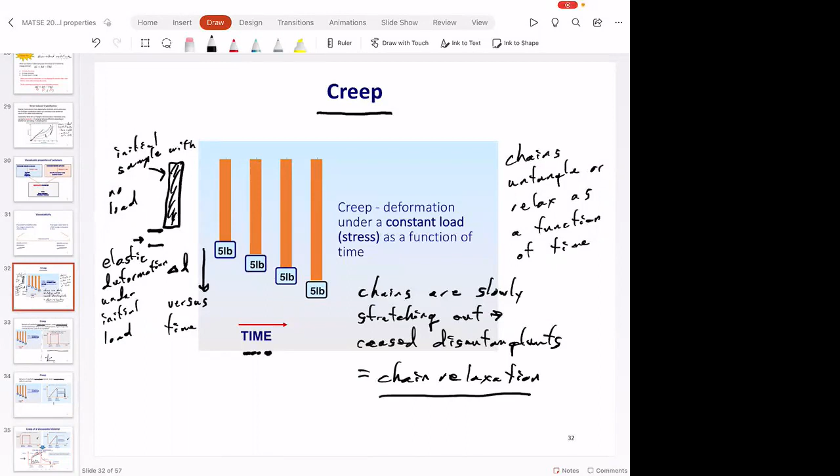Then from that strain, you get creep, or the delta L goes up, up, up, up. So the strain increases as a function of time. That's exactly what we've shown in this diagram right here. So strain increases because we're at constant stress or constant load.

And then when you take the weight off, you get some part of this elastic response back. So don't forget that in a spring, you can go both ways in terms of increase the load and increase the elongation, or decrease the load and decrease the elongation. So there is always some part of an elastic response versus something where you stretch it and it permanently deforms.

That's the plastic response of the material. And then you have some sort of creep recovery, and then you have permanent deformation as a result of that. So this is worth thinking about what's going on in a creep experiment. Questions on this? Okay, remember there's a scientific definition of creep.

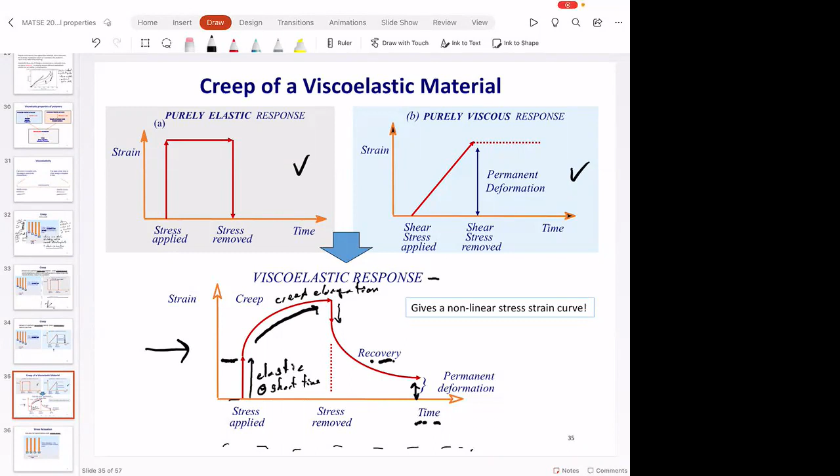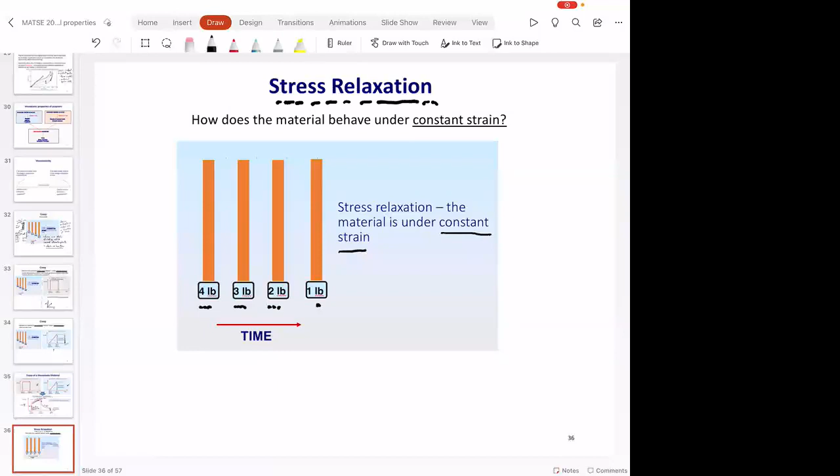So I'm going to elongate this like a delta L of 20% or something like that. And if I hold that polymer sample at a given elongation, you see the load it can support goes down as a function of time. So in effect, if I'm at a constant deformation and the stress is going down as a function of time, what's happening is my effective modulus is going down, down, down, because modulus is calculated from the slope of the stress strain curve.

So let's say I'm going to strain it 0.2, or 20%. This is, say, the 4-pound point. Then I'm at the exact same elongation, 3-pound point, 2-pound point, 1-pound point. So as a function of time, my stress is going down, down, down. And so the effective modulus, the slope of this line, is going down.

And it turns out that's also due to chain relaxation. When I stretch a polymer sample, all those chains are stretched out a little bit. And as they disentangle and relax, the material gets softer and softer because of chain relaxation.

Due to chain relaxation. So it's the exact same chain relaxation phenomenon that's happening that causes both of these responses. That's why it's important to know when creep is happening, under constant load, versus when you're under a stress relaxation situation, constant strain, and the load is going down.

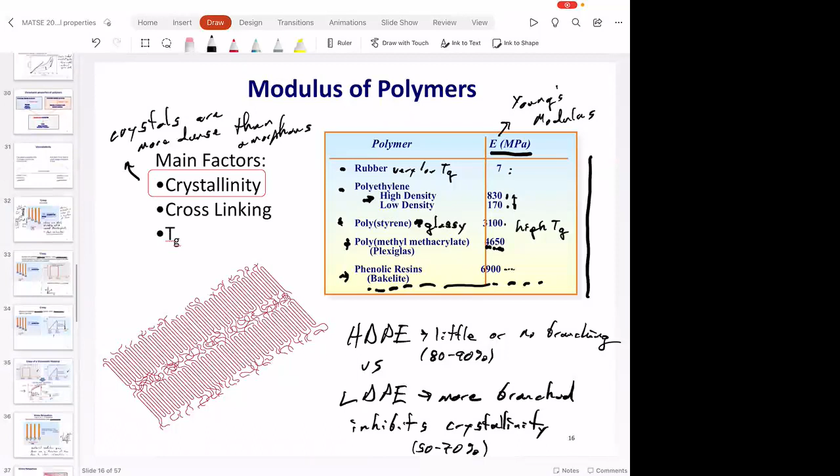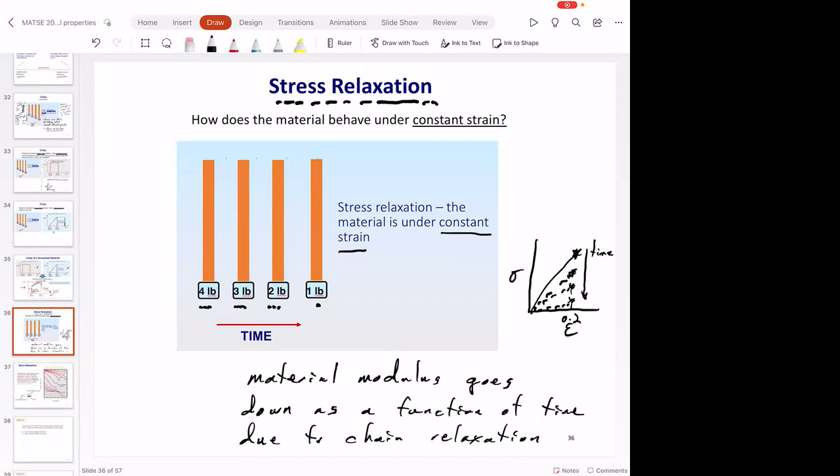We're going to talk about cross-linking. Crystallinity is a hard one because it has both amorphous and crystalline parts, but we'll talk a little bit about that. We think about chains for these types of properties because it's the intrinsic chain motion, the flexibility, the disentanglement that causes this type of viscoelastic response. People measure stress relaxation and creep all the time in polymers.

So in addition to the intrinsic properties of the polymer chains, temperature plays a big role in this. You raise the temperature, and do chains relax faster or slower when you increase the temperature? They relax faster, right? That's natural. You heat the chains up, they move around more. So creep happens faster at higher temperature, and stress relaxation happens faster.

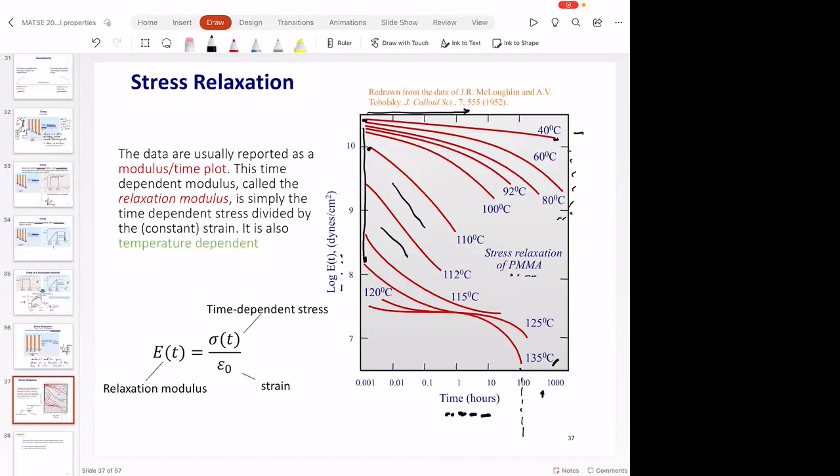And of course, if we didn't have any stress relaxation, we'd also have something that's perfectly flat, which means modulus doesn't change as a function of time.

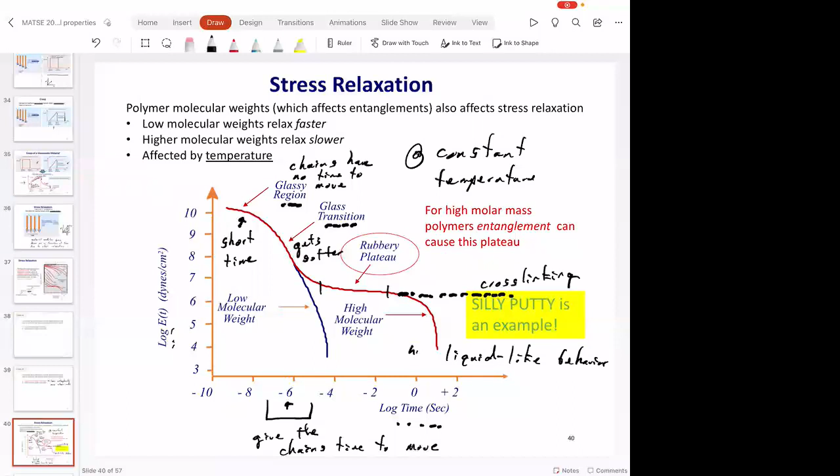Red. Higher TG polymers relax more slowly. Remember, glass transition temperature is a thermal property of the polymer. Here, we're addressing the time-dependent property. So even though we call it the glass transition region, it's time that we're really changing as our independent variable in the experiment. So this might be a high TG polymer, and this would be a low TG. When we talk about high TG versus low TG, we're really talking mostly about chain stiffness and some intermolecular interactions.

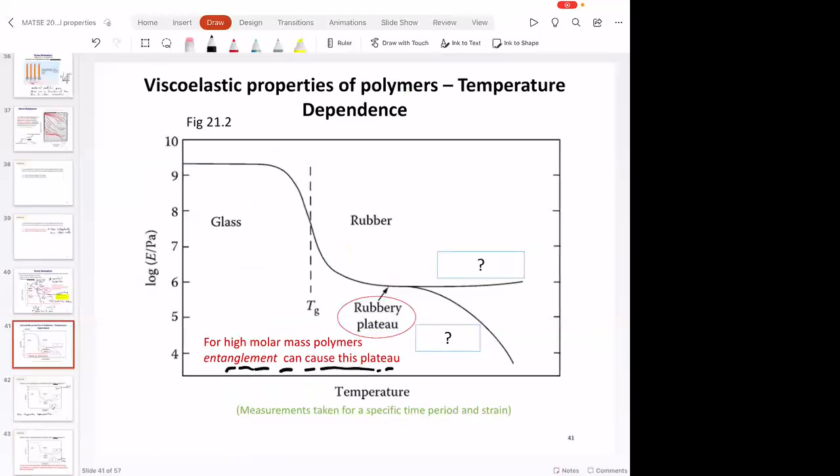Instead of waiting 100 seconds, or sometimes you see plots on the time where it's like 10 to the 5 seconds, that's getting to be a long experiment, you can just heat up the temperature and you can get exactly the same information. And there will be a lot to say in your advanced polymer classes about time temperature superposition.

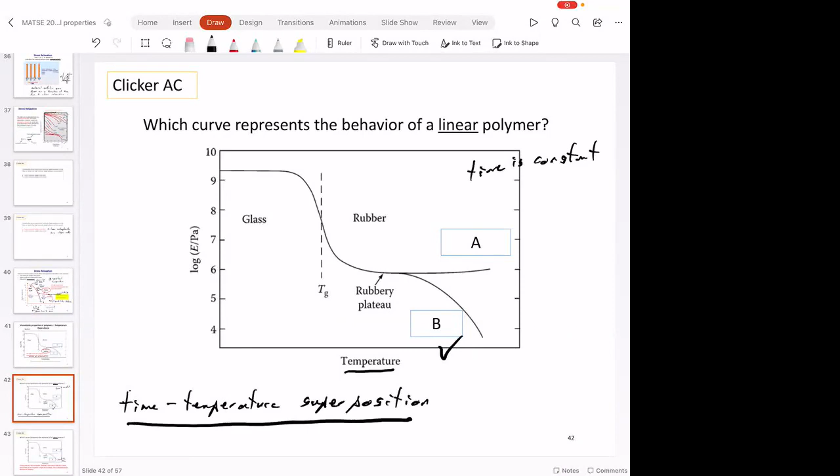And either Professor Hickey or Professor Colby will ask you, have you guys ever heard of time temperature superposition? And you could say, yeah, we heard about it in 202, but let's go into the details of how to relate one to the other, because there's some quantitative relationships that you can use in order to construct these time temperature superposition plots.

And again, having some feeling for what the molecules are doing, this is all about chain relaxation, and I can either wait for those chains to relax, increase the time, the material will get softer, or I can heat up the material, chains relax faster. If chains are relaxing faster at higher temperature, the material will be softer as well. Make sure that you are able to equate what the chains are doing with changes in time or changes in temperature. That's, I think, a new concept for lots of you, but this is fundamental to how polymers behave. Every polymer has a glass transition temperature, nearly every single polymer does this without exception. All right, questions or comments?

Yes. So for linear polymers, don't they usually have higher TG?

No, linear polymers don't have anything to do with TG. You can have a linear polymer with a high TG or a low TG. You can have a cross-linked network polymer with a high TG, or a cross-linked network polymer with a low TG. It's really the polymer structure or the monomers that tell you about chain stiffness and TG.

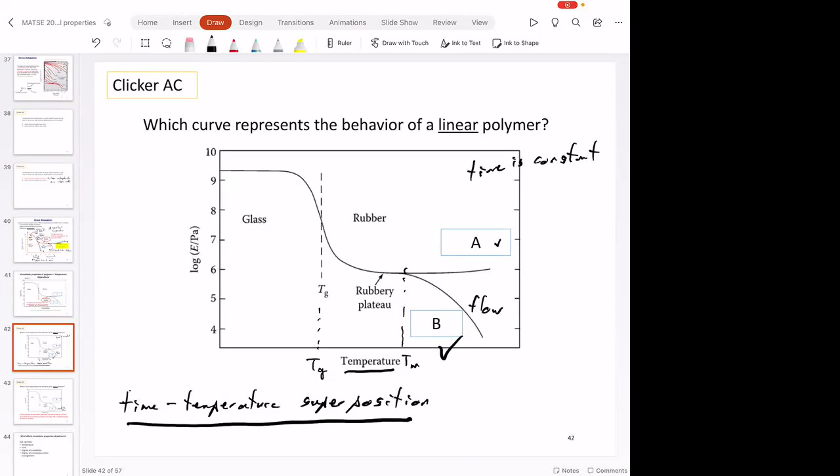Okay, any other questions? All right, last topic. So we're going to talk a little bit about viscosity and polymer melts, and then this will be the last thing for the exam. So you have an idea of what's happening with viscosity, right? It's the resistance to flow, and all Newtonian fluids have a defined viscosity.

I know the chemical engineers will really like this. If you make a measurement of the viscosity of a fluid, you build up the shear stress, and you have a shear rate that's defined by the gradient of the velocity and the distance. This shear rate is important because we just talked about time being important.

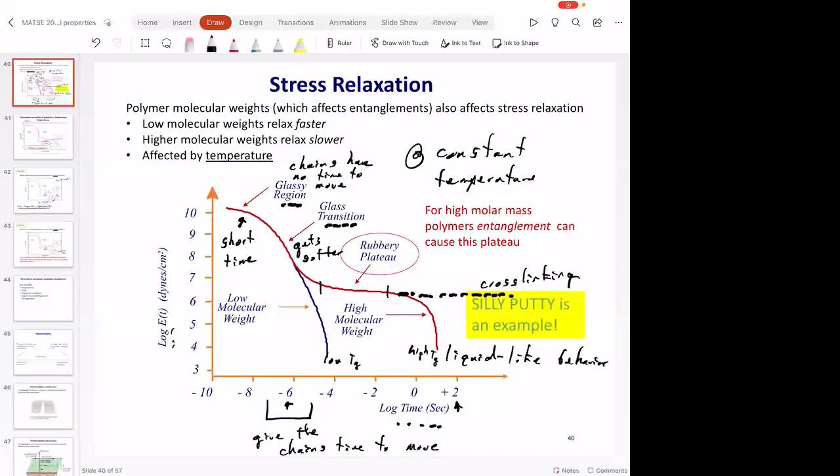What's the relationship of rate and time? Rate is just something per time. So higher shear rates mean what—a higher rate is really effectively higher time or lower time? Lower time. So as I increase the shear rate, I'm moving to lower time on this plot. If I increase the shear rate of a polymer, it's going to be more glassy. In effect, this time is usually expressed as a shear rate or as a frequency, and that's something to watch out for.

So shear rate is important because this is a time embedded variable.

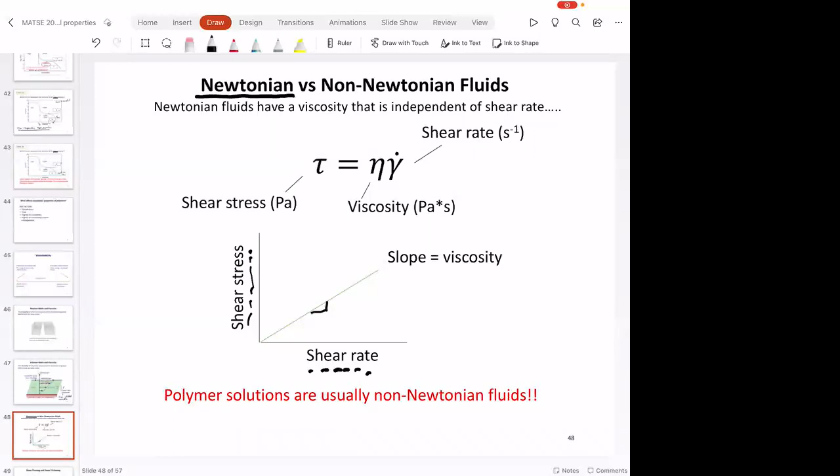A Newtonian fluid is defined as a linear relationship between the shear stress and the shear rate, and the slope is the viscosity. This should look familiar, just like elastic solids—elastic solids have a linear relationship between stress and strain. This is not the same as stress and strain, but this is the definition of what a Newtonian fluid is. And you get the viscosity from that.

Anything that is not an exact line between shear stress and shear rate is a non-Newtonian fluid. There's lots of cool behaviors of non-Newtonian fluids, but in essence we have shear thickening fluids.

So the question is: is polystyrene going to be Newtonian? No, polymers are almost always not Newtonian. The other question is whether it's going to shear thicken or shear thin, because it can only be one of those. And in general, polymers are shear thinning.

Does anyone know why, in general, polymers are shear thinning? As you shear the polymer in this parallel plate experiment, the effective viscosity goes down. Does anyone have a guess? Because you're straightening out the chains. You're straightening out the chains, and then what happens when you straighten out the chains like that? Why does the viscosity go down?

It's easier for them to slide past one another when they're a little bit straightened out. And in that act of shearing, you disentangle them a little bit. It's not like you shear it for a second and stop—this is steady state shear. So you're shearing it, which means you're disentangling those polymers. They're wanting to assume their equilibrium conformation, so they're disentangling from one another as you keep shearing it. So the effective viscosity goes down, and that's why polymers in general are shear thinning.

So you can answer that. Does anyone know a material that in general is shear thickening? And then you have to know the mechanism—why does it shear thicken?

I was almost like... isn't it like some sort of thing that hardens, and it's like—I forgot what it's called. It's like particles and they compact. Yeah, you're getting it.

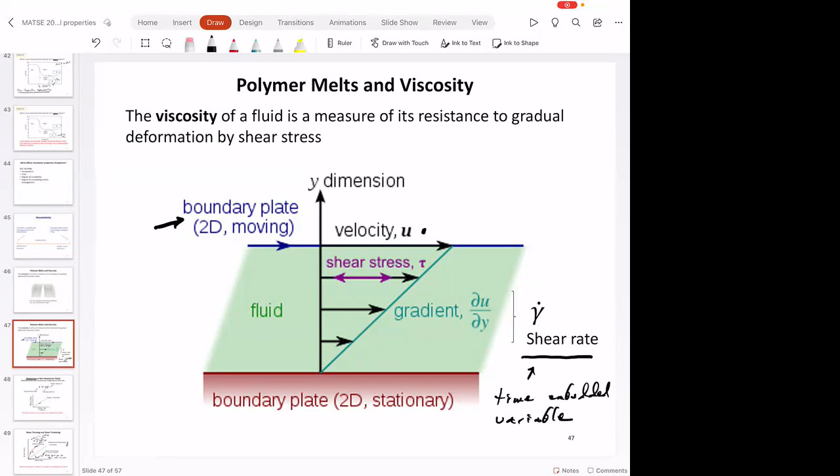So you need to think about what's practical versus what is the thought experiment. The thought experiment is that you have enough energy to move that plate as fast as you want, so you can go up and up in shear rate, and this shear thickening is going to go way up, asymptotically, and you can do that.

In reality, like in oobleck or in a magnetorheological damper or something like that, those things shear thicken so much they really slow down the shear rate, and then it goes back—it gets softer again. Good question. Any other questions?

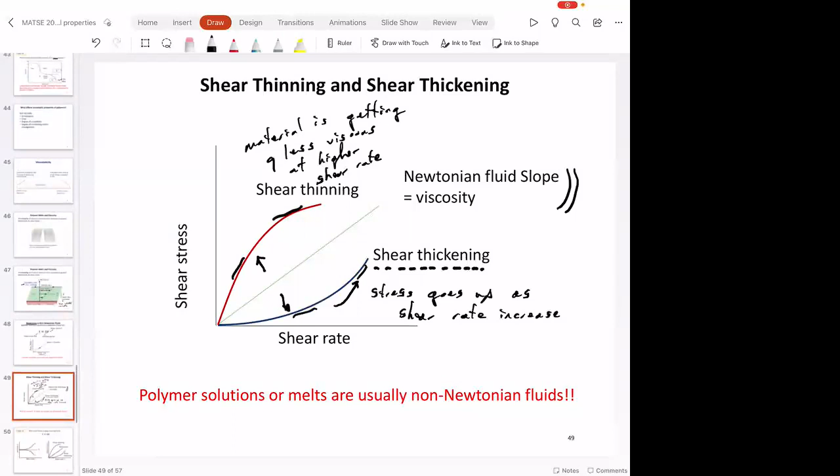All right, I think this is the last clicker question of the day. Which plot shows a shear thinning fluid? We know that this one is shear thinning, this one is Newtonian, and this one is shear thickening—remember this is shear stress versus shear rate. So the question is how to identify that on a viscosity, effective viscosity, or dynamic viscosity plot.

Of course, in some cases it's even a little bit easier if you remember that the derivative is the dynamic viscosity. This is shear thickening, and C is shear thinning. Of course, B is Newtonian. There we go, and so shear thinning, great, we got back to 45.

So shear thinning is really common in polymers because of this stretching out idea of the chains. The formula before, that was just for Newtonian. That's right, so this is a linear relationship, and so this is for Newtonian. I guess Newtonian has a capital N.

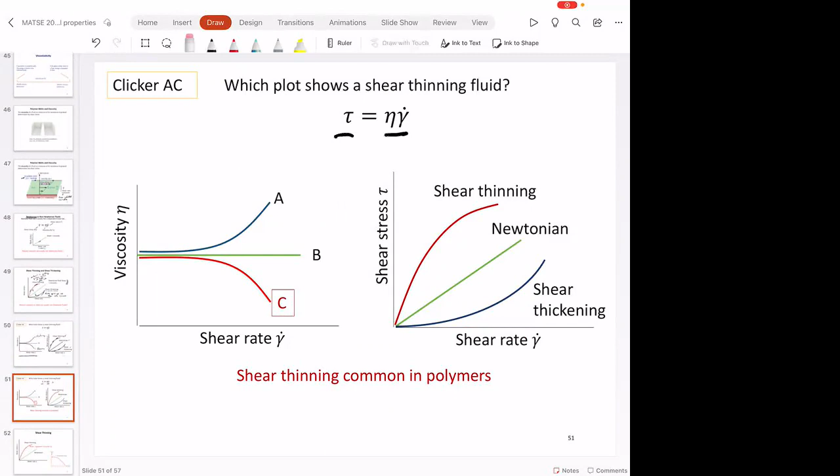There are really interesting things that can happen. Lots of times we might want to know the zero shear rate viscosity. So as we're at or very close to zero shear rate, we would have a high viscosity, and then we can measure the derivative of that. If we differentiate this, we get the apparent viscosity, eta a, or the dynamic viscosity, whatever you want to call it, as a function of log shear rate. Again, this is shear thinning, and you see it a bunch of different ways.

As we talked about, shear thinning occurs because you're elongating or aligning those chains, and so you see this effective viscosity go down as you go to higher and higher shear rate. That feels strange, because when we think, I'm going to shear this faster, it's going to feel like it's more viscous. That's not true for polymers, because we're taking the local derivative right here.

So why is shear thinning in polymers useful? Does anyone know why it might be useful? Creep's not that useful, stress relaxation isn't great — that's why polymer parts break at long time if they're not degrading. But why would shear thinning of polymers be helpful? Yes — when you increase the flow rate...

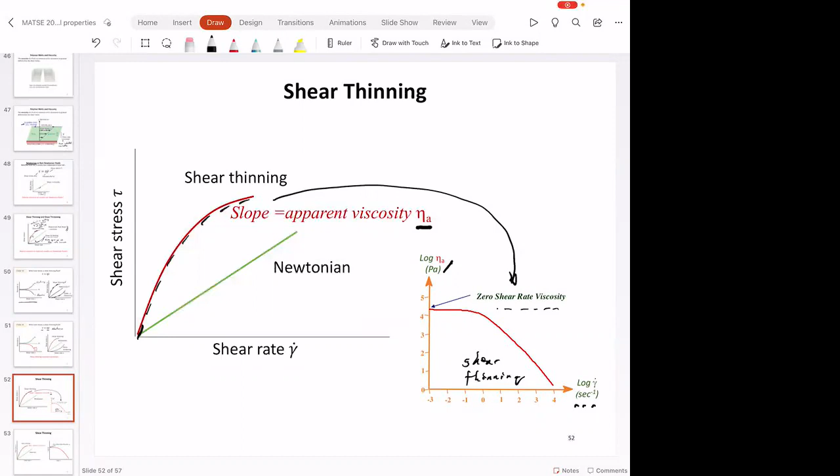All right, so we just talked about that. We know that the melt viscosity is really dependent on the molecular weight by orders of magnitude. So here is the degree of polymerization, and we see that the viscosity goes way up as a function of the degree of polymerization.

And oftentimes you see these two different regimes: you have low molecular weight and you have high molecular weight. Knowing what we know now, what's the difference between low molecular weight and high molecular weight in terms of entanglements? Which polymers have more entanglements? High molecular weight.

So you see the slope is higher in the high molecular weight region because you have more entanglements, and the viscosity is going up much more quickly as you increase the molecular weight versus the low molecular weight region, where the viscosity still goes up as you increase molecular weight, but not as much because there are not as many entanglements. You'll find out in polymer physics class that there's a key molecular weight where you start to have entanglements, and that defines the kink in this plot.

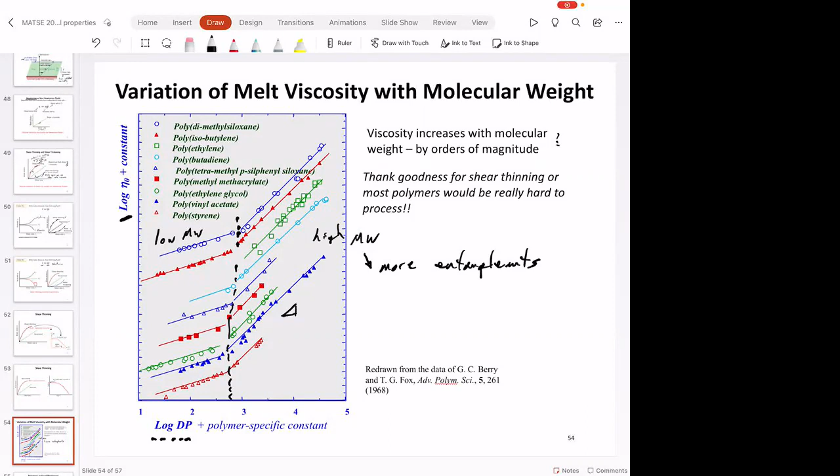Now, okay, so you can read that. That's great.

Yeah, so this idea of elongated chains and entanglements — this is plus chain relaxation plus time plus temperature, plus flexibility. All of these things impact the properties we've just talked about. And like I said, I'm going to try and ask you very clear scenarios where we don't have complications of crystallinity and other things like that, but you need to think about how the chains are moving and how that impacts whatever scenario we're discussing.

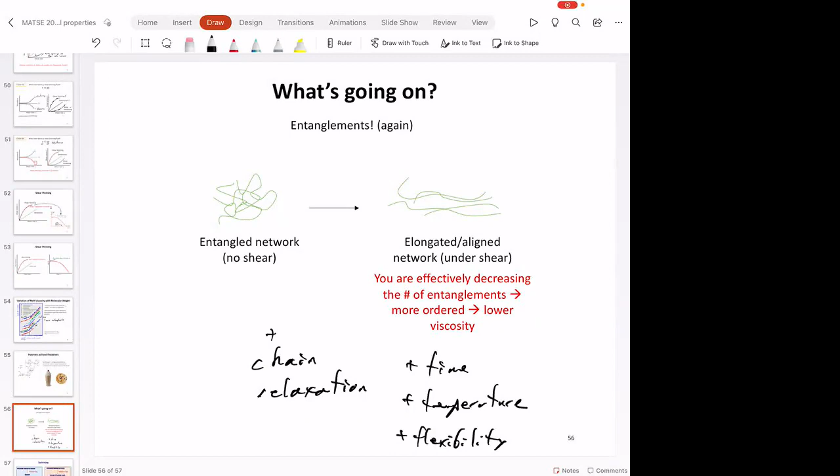So the last question I have is about some of the mechanics — what we're looking for, the viscosity effect of it. Well, there's a lot of different impacts of entanglements. So say, if polymers are more entangled, they do X, Y, Z; if polymers are less entangled, they do X, Y, Z. So discuss creep, discuss modulus, or discuss stress relaxation, discuss viscosity — just give me a couple points for each.